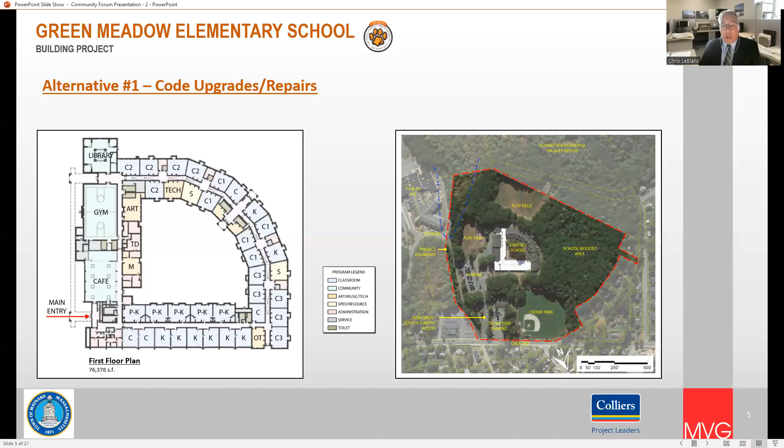Alternative number 2 is our first addition renovation project. This project will include a 2-story academic wing addition. It will also keep the existing gym, cafeteria, and the art and music suites. It will eliminate the pre-K, K wing, and the curved grades 1 through 3 wings that were part of the latest addition.

Unfortunately, I should say, the pros would be it does address overcrowding, and it will address the educational plan requirements for the district. It'll also incorporate visioning goals. This particular addition will minimize the use of the existing building that would be renovated to help meet those goals.

Some of the things with this particular addition and renovation is it would include multi-phase construction, which would require portable classrooms to house students while the additions and renovations were taking place. It would also include some interior ramps, but it will improve site circulation and parking, separate parent and drop-off areas, and secure play areas, and even include some Crow Park integration.

Alternative number 3 is also an addition renovation, but with this scheme we'll keep a little bit more of the existing buildings, such as the pre-K and K wing, which would be renovated to meet the new needs of the educational program. Alternative 3 also addresses overcrowding, and it does address and provide for the educational plan requirements that the district put forward.

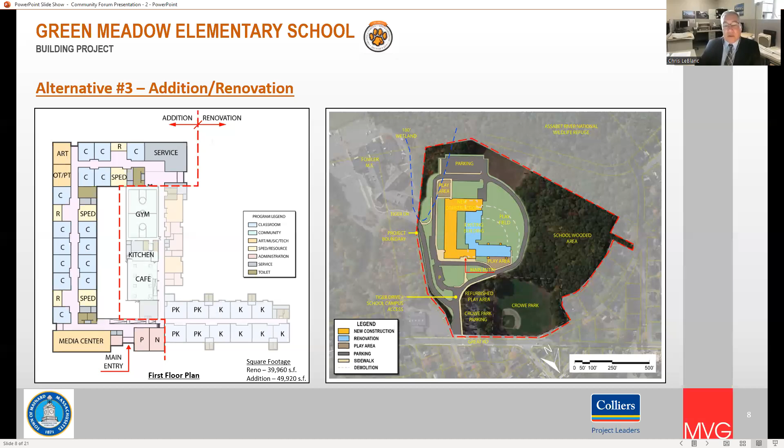It will also incorporate the visioning goals set forth by the visioning workshops held earlier this year. It does improve site circulation, although it does include a multi-phase construction process, and again with the addition renovation, portable classrooms would be required to house students during the various phases of construction. It will provide the appropriate play areas, parking, and athletic fields as part of this particular alternative solution.

Alternative number 4 is one of the new construction options. This particular plan is full ground-up new construction. It does address overcrowding and certainly provides for the educational plan requirements, meeting all those requirements, and it incorporates all the visioning goals set forth by the visioning workshops.

This particular new construction would have very minimal site disruption. The nice thing about this is it does provide for community space at one end of the building, allowing the classroom wings to be locked off and secured during weekend and night activities.

With the new site, we would have improved site circulation and parking, with parent drop-off and bus locations separated, providing a secure area for both functions. Secure play areas and replicated fields would also be included, with some Crowe Park integration, making this a fully integrated site.

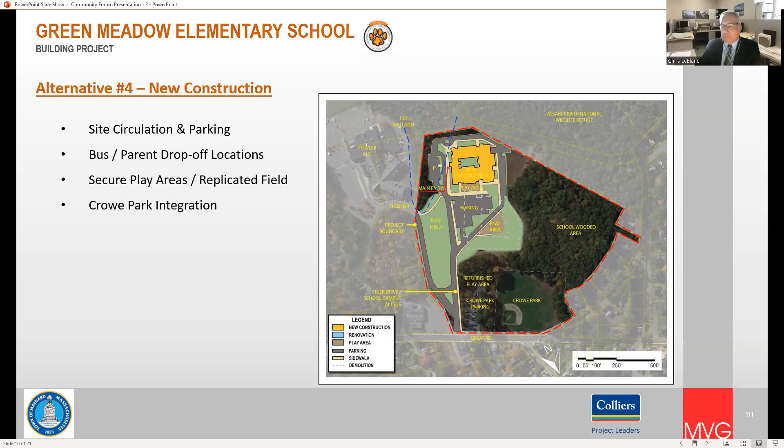Alternative number 5 is also new construction. As with all new constructions, it addresses the overcrowding and the educational plan requirements set forth by the district, and it also incorporates the visioning goals set forth by the visioning workshops.

The community space will be located at one end of the building, again allowing the classroom wings to be locked off and secured during various weekend and evening functions by the community.

With alternative number 5, again, site circulation and parking is addressed and provided. The separate parent drop-off and bus drop-off will certainly provide secure areas for both activities. Crowe Park integration, secure play areas, and replicated fields are also part of the site design.

And with any of these sites, we can pick and choose or select some of these different features and parking layouts that can be incorporated with any one of the site features and layouts.

Alternative number 6 is, again, a new construction option, ground up. It addresses overcrowding and the educational plan requirements. The nice feature about this is a very compact plan.

It provides the community core spaces in the middle of the building, easily accessible by both classroom wings, which are flanked on either side. Those areas can be secured during evening and weekend hours when the community has full access to the community spaces such as the gym, cafeteria, and media centers.

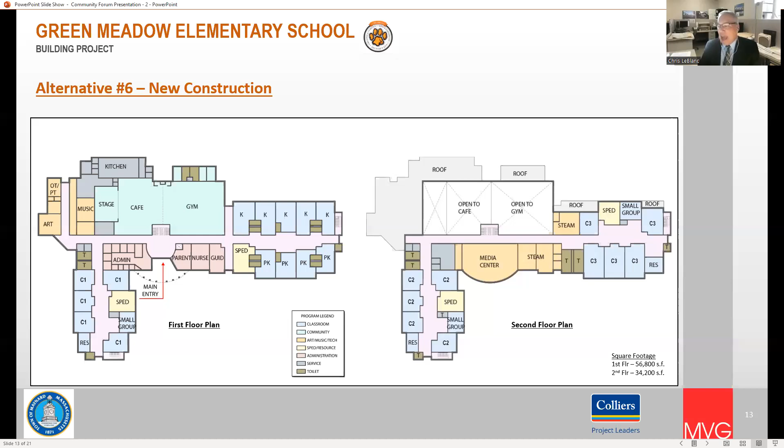This particular plan is very efficient and has an ease of adding on in the future on both classroom wings. It's a 2-story construction project, just as is with most of the new construction.

The new alternative site construction also includes site circulation and parking, with parent and bus drop-off separated to provide secure areas for both, and gets traffic off the main street.

Play areas and play fields are also going to be replicated with appropriate structures for age-appropriate students. This plan also integrates Crowe Park into the overall site design so that the entire site can be used by both community and school-wide uses.

Our last alternative, number 7, is again a 2-story new construction project. It does have a center core similar to alternative number 6, flanked by 2 classroom wings. This is a 2-story construction option.

It does address both the educational and the visioning goals set forth by the district and the workshops. Similar to alternative number 6, it's a full and very compact plan.

It provides easy wayfinding so that students in either of the classroom wings can easily access the community areas, the cafeteria, the gym during school hours, and the art, STEAM, and technology areas on the 2nd floor, which are both community use and district-wide use. It provides appropriate site circulation with appropriate play areas for kindergarten and grades 1 through 3.

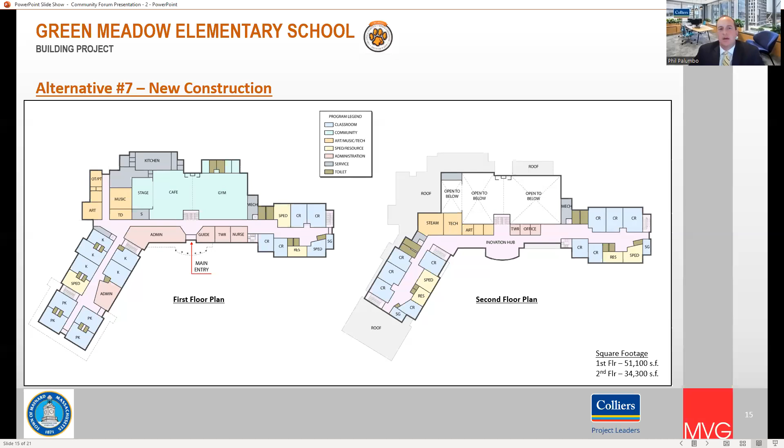Chris, you want to get into some of the site layouts that have that connection? Sure, thank you, Phil. So those are some of the features in various site layouts that can be integrated from one to another. As mentioned in the question, we're going to be working with the district. This has come up, and we'll work to make sure we do get some walkways and integration between both schools, because we understand there are students from the elementary school who will also participate in after-school programs from Fowler.

With the appropriate solution for a new Green Meadow, I'm sure the Fowler students may want to use some of the features in the new or renovated building for Green Meadow. We will make sure there's some integration with drives and walks, learning opportunities, maybe outdoor learning opportunities. There are wetlands that separate the school, but there are opportunities for learning science and other subjects outdoors. So we'd like exploring that as well.

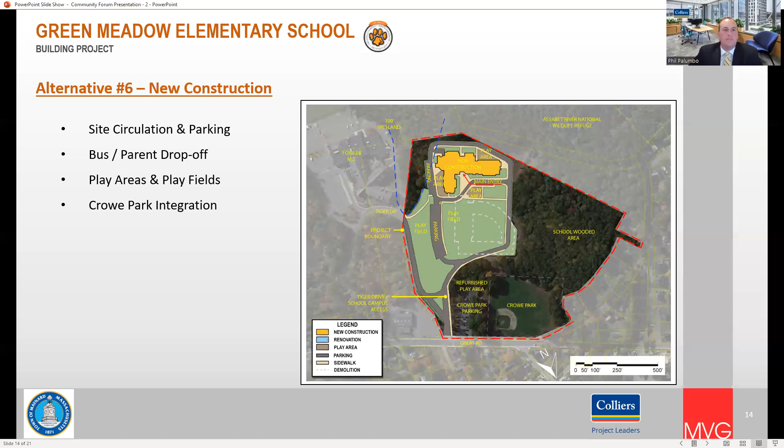So that's all the questions I have in my chat. Colleen, I remember at the last forum you potentially had some questions in your direct chat. I don't know if you have any. I do not have any right now. Okay. Oh, Mary, you got your hand raised? Hold on one second. Go ahead, Mary. Okay, I'm all set.

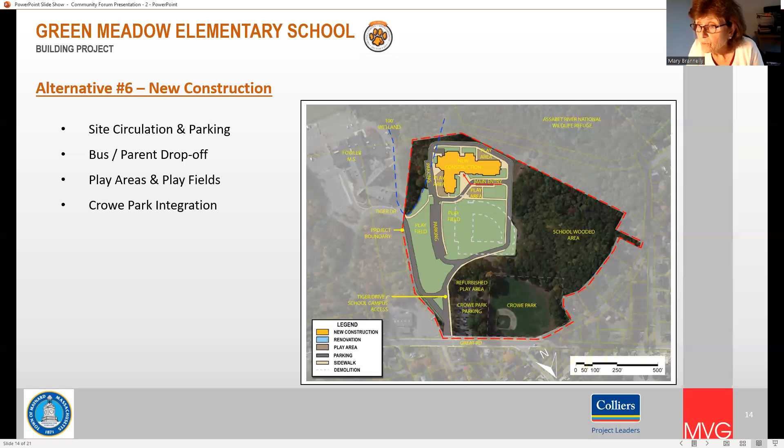Thank you. It wasn't a question, it was a question from somebody the other night who was talking about the library, so in that hub—could you talk to that a little bit, Chris? Sure. The Innovation Hub, again, it's just another possibility we've done and explored with other school districts, and wanted to share with the town of Maynard as well.

So the Innovation Hub is essentially a media center that is flexible enough to include other programs, such as art, STEAM, and technology related programs. But it does indeed act as a media center as well. There's reading areas, book stacks, technology areas, but it provides more flexibility with inter-program usage.

I'd like to add, Chris, that we're currently working on a plan which provides for a corridor through that area. So we're taking advantage of the flexibility with moving some things around, and we've listened very closely to people's concerns. We'll be able to show that to you quite soon. We've been combining the things people like about 6 and 7, trying to make a real good compact building that does everything as best we can.

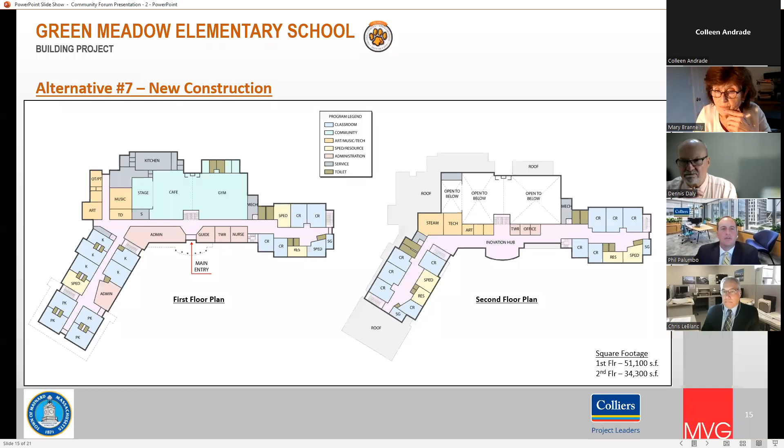Natalie has a question. Will the appropriately large roofs have solar or be solar ready? Yes, the whole idea is to make them solar ready, so different vendors can have access to all the resources they need on the roof and provide the school and the town with the best product possible. The structure will be adequate and designed for that.